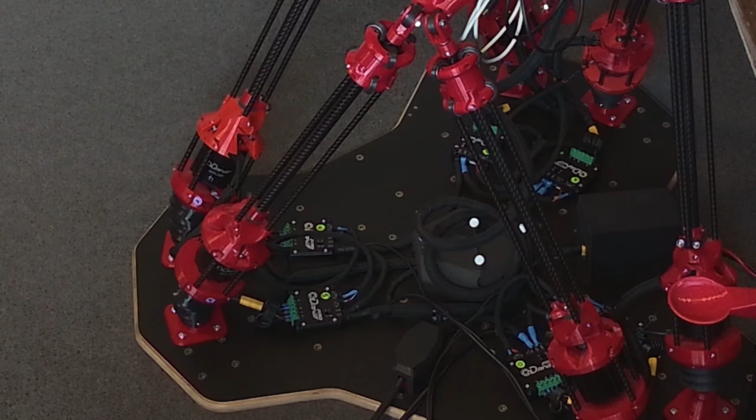The process of putting Jugglebot back together was fairly uneventful. I took the opportunity to give everything a good clean, a good wipe down, and the base of Jugglebot is looking cleaner than it has for quite some time. I don't know if this camera is really going to show it very well, but everything is nice and orderly down there, which I'm a big fan of. Not much dust down there, and hopefully my little protector thing keeps it that way for some time.

Before I get to the only problem that came up in the entirety of the construction, I did also change the hand spool over from the old 3D printed one to the new aluminium one. I am going to be taking some videos of what the new one looks like, but when I had the old one on, being a bit more critical of the printed design, I could pretty easily discern that the string was not perfectly uniformly running up and down the spool. And once I replaced it with the aluminium one, it was much smoother.

I haven't actually run anything through any actual movements yet now that the robot's been put back together. I'll talk about why in just a sec, but I have high hopes that this spool will not cause me any problems anymore, which will be lovely. I'm keen for all problems to be gone.

The only problem that did come up during the reconstruction of Jugglebot was that for some reason the threaded insert inside this part, which is the final stage of the universal joint that's on the end of all of the legs, in one of them the thread was super munged up. I could get the shoulder bolt in halfway, but then there was something in the thread that was stuffing it up. This was the second last actuator that I had to put on, and at the time I was like, this only needs to go on once. If I can just brute force it in, then I don't need to worry about it anymore and the problem will go away.

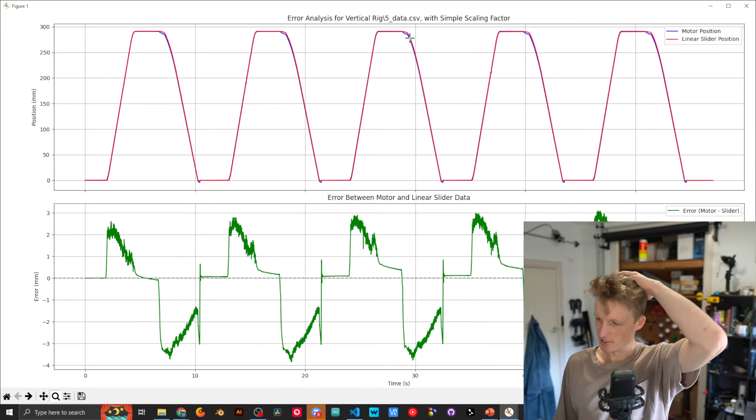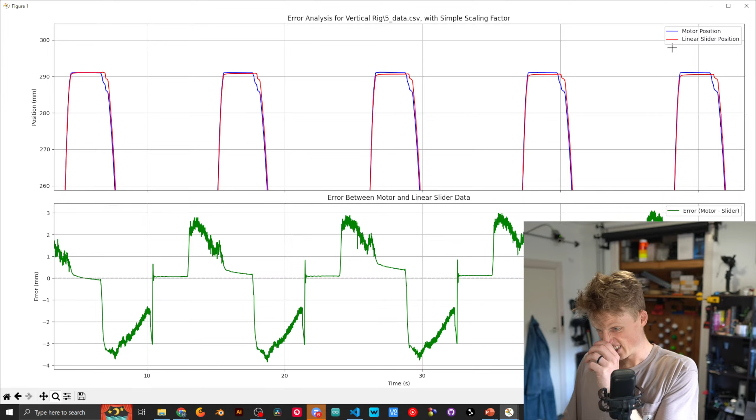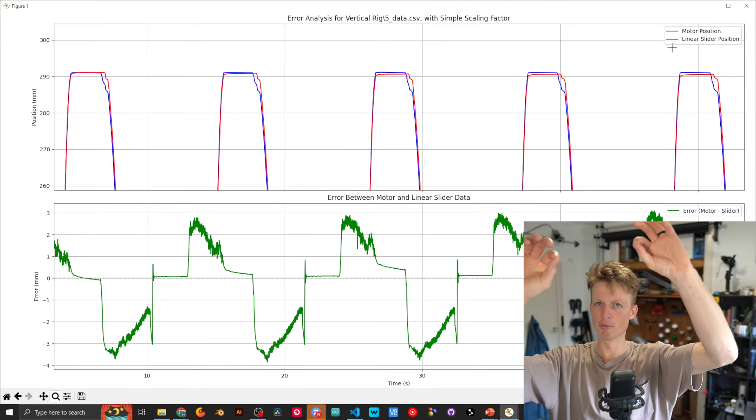So I was thinking of other ways to improve this, and you can see in the title, I've got simple scaling factor. This is the way that I have been scaling this data every time I've shown it to you. What that involves is we leave the red line, the linear scale measuring data, as it is, and then we just take the maximum value of the motor position data and scale that so that it matches the maximum of the linear slider. So we're basically picking the maximum of each and raising it so that both maximums are the same. In my mind, that is the most straightforward way that I could possibly do this.

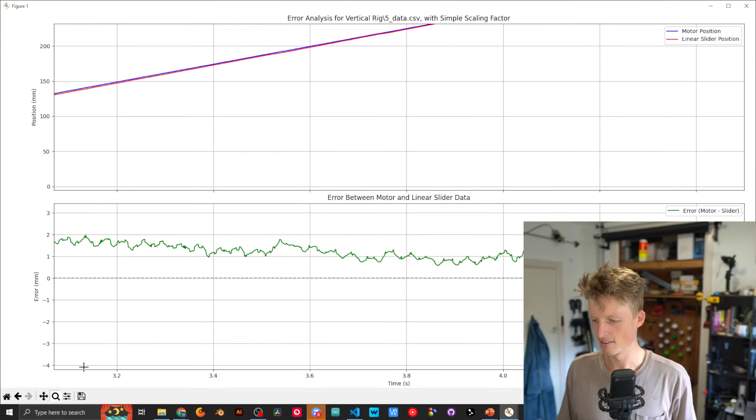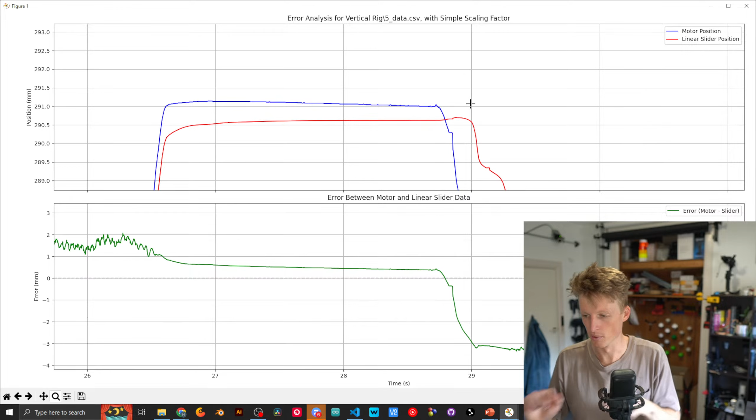It doesn't even consider the rising stage at all. It's only looking at just the maximum. And also, this is after the 0 points have already been aligned, so they're both aligned at the start. And I was like, well, that's a super basic thing. If there is any erroneous peak in the motor data, it could just be this little tiny bump here. I don't actually know what the maximum for this one is, but if that little bump was a bit bigger, that could really mess up this scaling factor and throw the whole thing off.

So I thought, okay, I'll do a slightly more sophisticated approach, and I'll show you on a different one because that one wasn't a good example, nor is this one. I'll show you my code as well. Okay, this one's better. So my idea here was that rather than taking the absolute maximum, we can take the average of the position when the slider is at the very top. The actuator has fully extended, it holds its position for, from memory, 1 or 2 seconds, and then it goes back down.

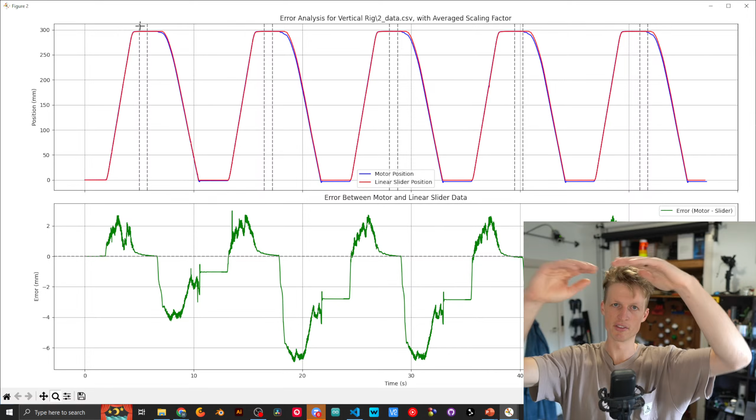So I was thinking, when it's at that held position at the very top of its stroke, we can take the average of the linear slider position and the motor position, take the average of all 5 of those, and then use that to construct this scaling factor.

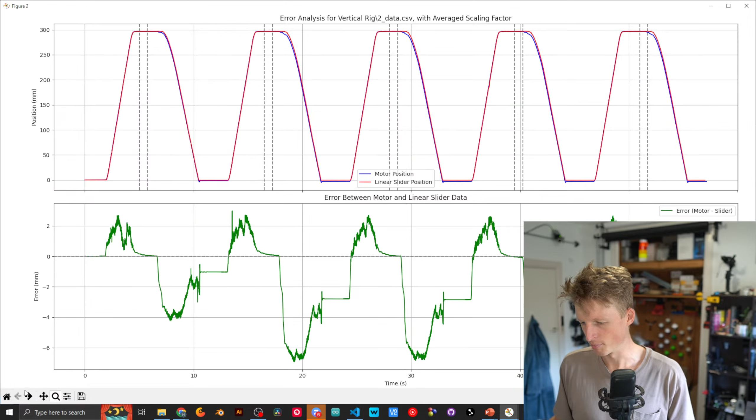And so we can see here, these gray dotted lines are the start and the end of the period that we're averaging over for each sample. So we're basically taking the average of all of these gray sections for both the red and the blue data. And I would have thought that would lead to a more accurate scaling factor, so that way we would have, on average, less error throughout the entire data set. But that's not how it worked.

So I'll go into a little bit more detail with that analysis in just a sec, but I want to show a summary of what I've found. So keep in mind as well, don't forget that we have 2 sets of data for each actuator. We have a set where I had the testing rig vertical, in the in situ-ish situation for the actuator. So everything was vertical. The big problem with that is that because it was all vertical, I couldn't really support the measuring stand super well. So it was wobbling a little bit at the start and at the end.

When the actuator was starting to push or pull, the whole tower would kind of shift a little bit, which I thought was a no-go, and that was adding to the sources of error here. And I was like, okay, that's terrible. I'm going to do a horizontal test. So we also have a second set of data for every single actuator in the horizontal case, where the entire testing rig was clamped down onto my desk and there was no movement at all except for the actuator itself, obviously.

So I've gone through all 12 data sets, so 6 actuators, horizontal and vertical, and I've looked at both the simple scaling and the average scaling, and this is what I found. So what I'm about to show is the data set and type of scaling factor that has led to the smallest mean error and standard deviation error. From memory, for all of them both of those results were lower. So the mean was lower and the standard deviation was lower.

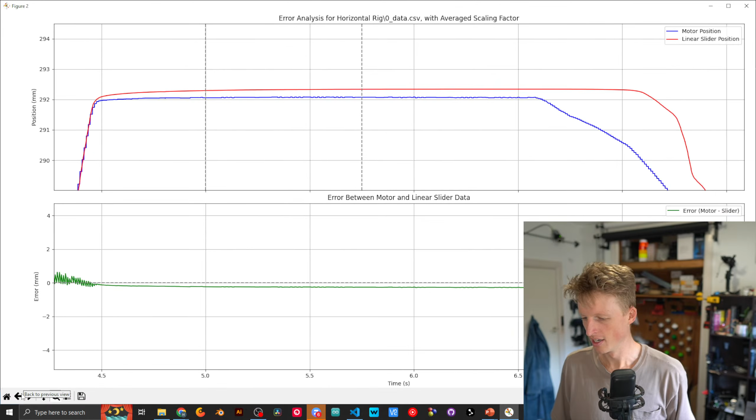And we are above a certain threshold so that we're not looking at the bottom ones as well. And then, yeah, just do that for all 5 peaks. But that wasn't working. I think part of the reason is because despite the fact that this looks flat, it's not actually flat. I mean, I guess I could just set the threshold to be like 0.1 or 0.5 millimeters or something. That would probably work. But I couldn't get it to work and it was just frustrating me and I wanted to just get it done. So instead, I just did it manually.

And I was thinking, okay, cool. Because all of these actuators ran the exact same procedure where they would do the exact same motion, I didn't change the code at all between all 12 of these tests, they should all have the same time. So we should be able to say, band 1 is between this time and this time, band 2 is between this time and this time, and so on for all of them. But unfortunately, they did not all go at the exact same time.

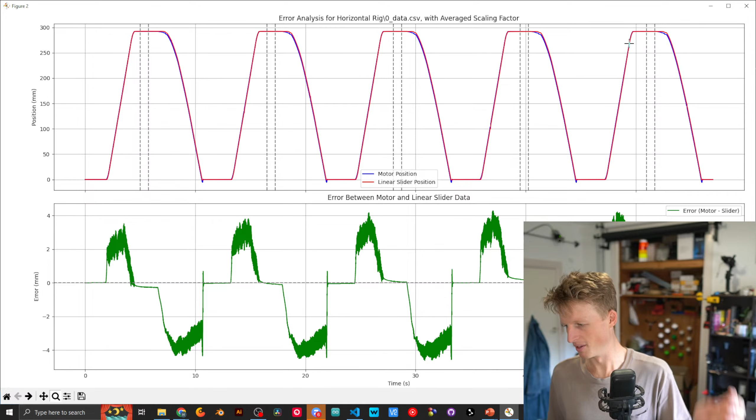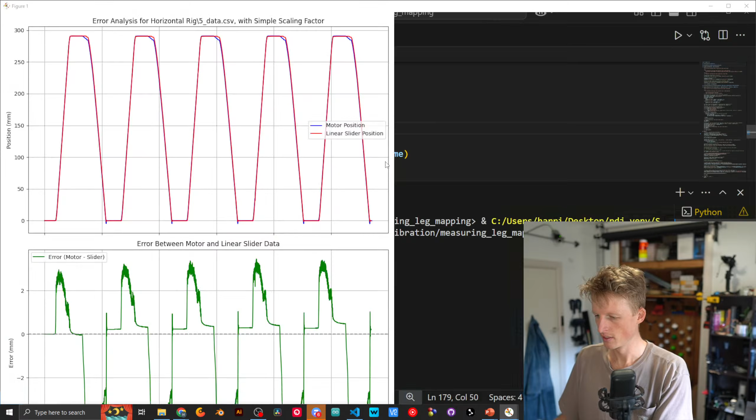So like here, for the 0 data, we can see that the bands are pretty solidly in all the flat regions. But then if we look at, for example, 5, they don't line up. Oh, maybe it's the vertical one. Because that one was actually pretty close. Oops. So with the vertical one, yeah, it's all the way off the end.

So here, I don't know why. Maybe it was because we had to push against. No, that doesn't make sense. I'm not really sure why, to be honest. These are slightly different. Something caused the actuators to run a bit faster. Maybe I did change the code between the vertical and the horizontal ones. I don't remember, but yeah, so we can see that the window is now pushed off the back.

So it's a very naive approach, and not for all of them does the window exactly match up perfectly with the flat region. But I'll talk about that more in just a sec. I'll talk about the good display of difference thing in a sec as well at the end, once we get through all of them. So for 3, vertical simple is the best, which is like, why? The tower was wobbling everywhere. Why is that better? 4, vertical simple as well. And then 5, vertical averaged, which is the one that I just showed.

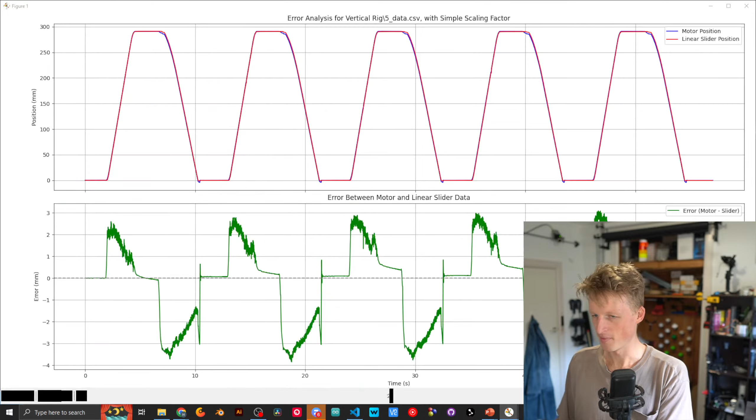So this has less error than the simple scaling approach, even though this window is averaging over these data in here, which is clearly not the peak. So what? So yeah, it seems like having a lower scaling factor leads to less error. But I think part of the reason why that is the case is because for all of these samples, we see that the motor on the way up and down is where all of the error is happening, just on the up and then just on the down. At the top and bottom, it's not so much.

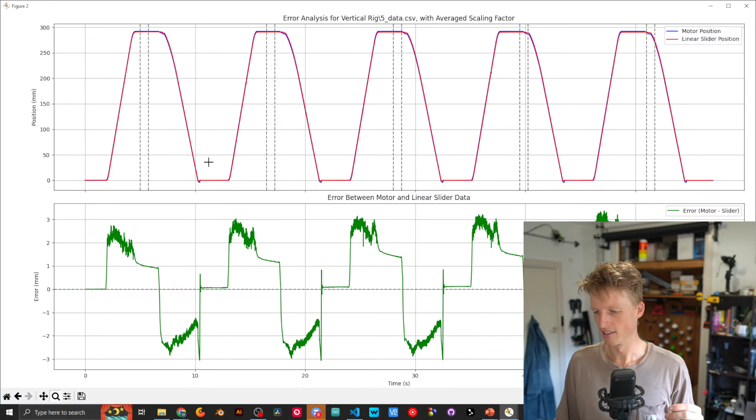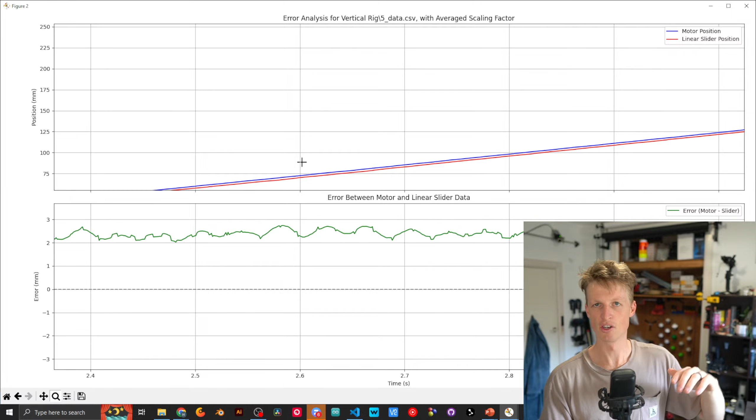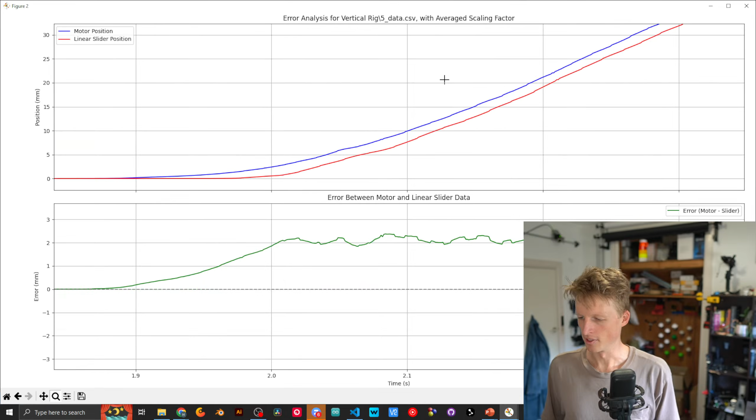So I'm thinking the reason why this is showing a lower overall error with a lower scaling factor is because the motor data is higher than the measured data, for a reason I'll talk about in a sec. And so by having a lower scaling factor, we're kind of compensating for that. Now, the reason why I believe the motor data is above the measured data, or the linear data, is because of the slop in the actuators, basically.

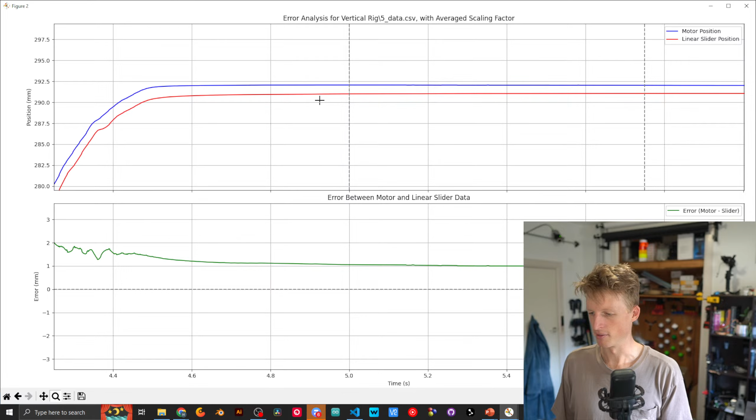So at the very beginning, the motor starts to spin, the string is starting to take up the tension, taking it up, and then eventually it's all taut, all of the slop is gone, and then the linear part of the actuator actually starts to move. And that, of course, means that the motor position is going to be ahead of the measured position all the way up until the very end, when they meet up again. Well, in most of the cases, they meet up again. Let's look at the average of all of these. Okay, no, because we've scaled it, we can look at this one. With the simple scaling, they do meet up pretty closely.

Yeah, so I'm thinking maybe because of that offset, having a lower scaling factor will be less erroneous during the movement phases, which is kind of artificial, but also kind of legit, because when Jugglebot's actually working, it's going to be spending a lot of its time moving around. And if we are ever needing it to be in a precise position while the actuators are moving, it could be better to use a lower scaling factor to compensate for this stretchiness.

But then if we're trying to get Jugglebot to be really precise when it's still, we maybe would want a slightly different scaling factor, so that once the Jugglebot is stationary, all of that slop has gone away. It could be elasticity in the string as well. So once the actuator has stopped moving, that elasticity continues to extend the actuator just by that little bit more until that elasticity is gone, and then it's at its correct position.

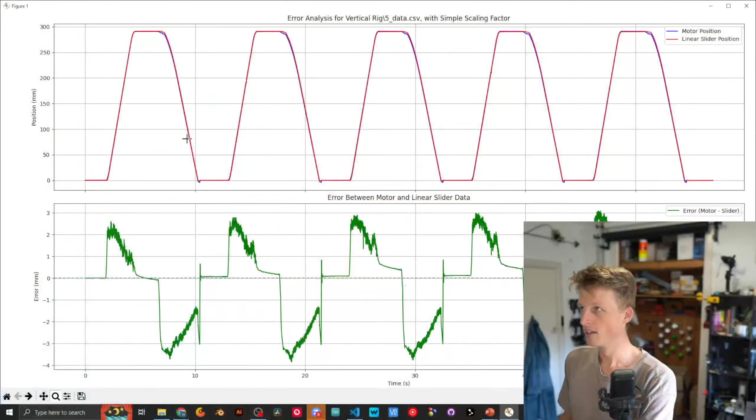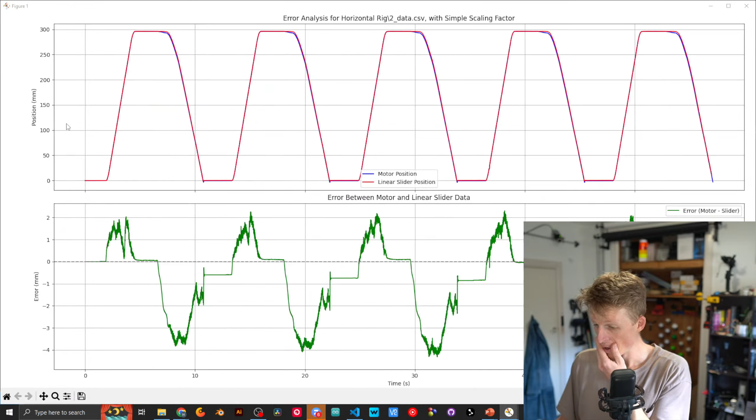But whatever the case is, it seems like the actuators are behaving slightly differently dynamically as they are statically, which makes it a bit annoying to calibrate them precisely. Yes. The one other thing that I wanted to show is for actuator 2, the horizontal data. And yes, so here, it doesn't really matter which scaling factor we look at.

Here we can see there's a massive, massive difference between the positive error and the negative error. And this is indicative of when the actuator is extending, we're getting this positive error, and then when the actuator is contracting, we're getting this negative error.

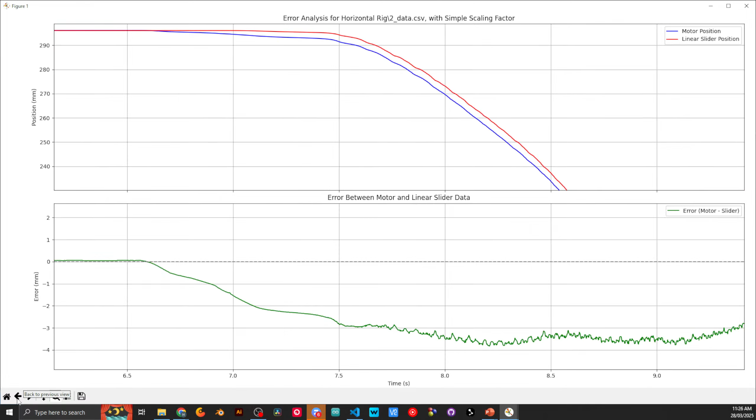And I believe it's for the same reason, where the motor starts to move down, and then it pulls the string, pulls until all the tension is gone, or the slop, or whatever it is, is all gone, and then the actuator, the linear part, again starts to move. Which does put the motor position data below the linear slider position, which, I don't know, they seem to all be slightly different.

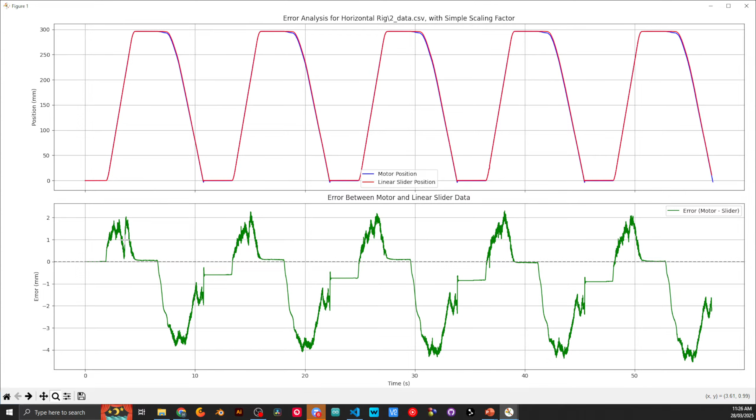And so what I wanted to point out here is the fact that for this particular actuator, there is a lot more error, like double, on the downstroke versus on the upstroke. And I believe that this is related to the fact that there are actually 2 strings in each of the actuators. It's not just one continuous string, even though it could be, and it probably should be if I knew that that was a possibility when I was designing this. But in any event, there's actually 2 strings in there.

So there's a separate string for extension, and a separate string for contraction. So this is suggesting that the 2 strings are not both perfectly tensioned, so that, for example, if the extension string is really nicely tensioned, but the contraction string is not, then the extension could be really precise and nice, but then when we go to contract, there's a bit more give in the system before it actually starts to come down.

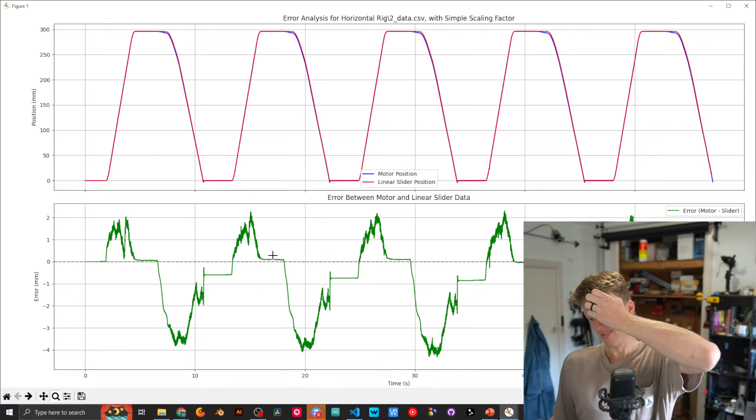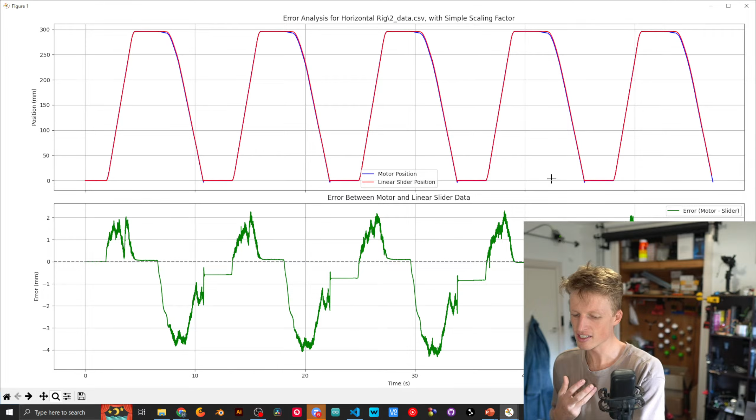This one is the most egregious example of that. Most of them are pretty closely mirrored on the top and the bottom, but for this one in particular, the contraction stroke was way more erroneous. Which, again, I don't know. In my mind, this would suggest that I could go into the actuator and retension that string, but I checked all of them when I was going through this process and they all seemed approximately equally tensioned. I don't have a good way to actually measure that tension.

I was considering making a device, a tension gauge sort of thing, like how you measure your bicycle spoke tension, which is basically there's 2 pins and then there's a spring-loaded pin in the middle, and you put 2 pins on, let me draw it. Using my hands can only get so far. Let's go to this.

And I was considering making this so that way I could just check that all of the strings are equally tensioned, but I ended up just kind of going for the old twang and listen to it test. And yeah, it's hard to get it to be really... I think that would be a rabbit hole that would take more time than I anticipated.

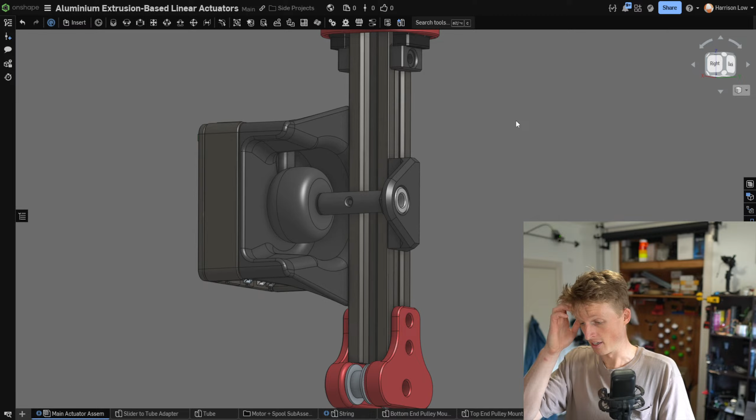So this is what I'm thinking. Everything is going to be based fundamentally on a piece of aluminium extrusion, and there are many variants of this design that I think are very possible, and I'll go into those in more detail in just a sec. But the backbone is the aluminium extrusion. And then on either side of that, we have two linear sliders. This is just for this particular instantiation of the design. So we have two linear sliders that slide together.

One possible concern that I have right off the gate is that both of these will need to be very carefully aligned. I don't have much practical experience with that, so I don't know how easy or hard that's going to be. My thinking is that we can put in the bolt on the very bottom one and do that up tightly, with both of them joined together, and keep the rest of the bolts loose so both guide rails can swivel around, then slide this all the way up to the top and do in the top bolt. In my mind, that should mean they're both perfectly lined up. And then, of course, tighten up all of the other bolts in the middle.

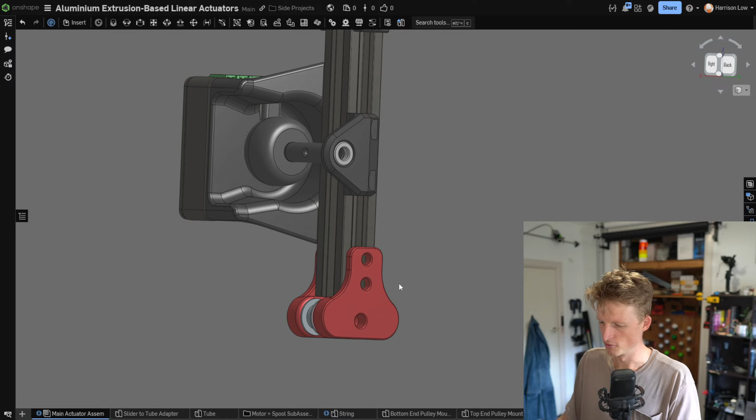In this version, it is actuated in the exact same way as the hand actuator on Jugglebot right now. I only just added this component last minute this morning just to complete it. So the string line is not perfectly designed right now. This pulley should probably be in a slightly different position. But then the string goes up, around,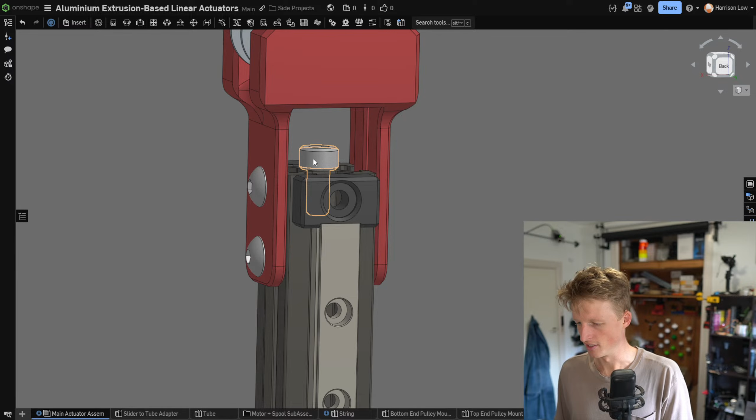up over here, and there's a tensioning mechanism in here, which is identical to the one that John designed for the current hand actuator. This is currently fixed in the CAD, but of course this hole is threaded. So if you want to add more tension, you just loosen these 4 bolts on the side, extend this bolt out with a nice convenient hole in the top, and then once you've got the right amount of tension, you can redo these 4 bolts on the side.

And I love this tensioning mechanism. I think this is so clever. John did a very good job designing that part, because for every millimeter that this raises up, you're actually extending the string length by 2 millimeters. So it's like a magnifying effect of how much tension you get for how far you extend this part out. It's very nice. I am a big fan. Of course, the string will then come down and attach onto this part in some fashion.

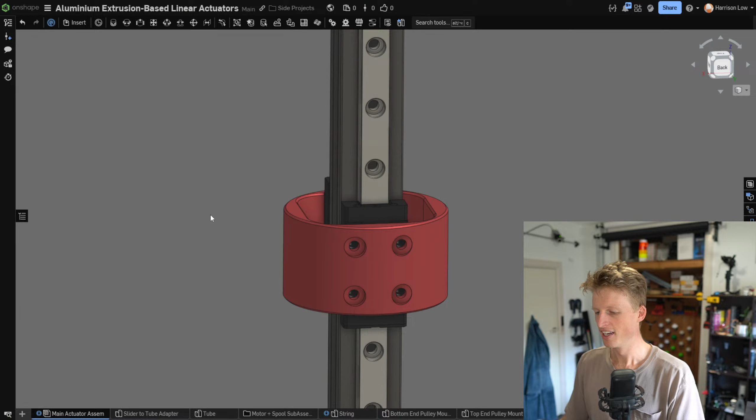Unfortunately, I didn't have as much time as I would have liked to fully flesh out the CAD of this design. I got a bit distracted with some other stuff last weekend, but it was good distraction, doing productive things that were just not this. So there are a lot of fine details here that need some work, but hopefully you can get the general idea. The main reason I'm sharing this now in its incomplete state is that all of you have historically been extremely useful in troubleshooting and coming up with different ideas for how these things work.

And I think the earlier that I introduce it to the world, the more quickly I will get feedback, and the less likely it is that I'll go down the wrong rabbit hole. Like, I am fairly certain that if I had done this same process for my current linear actuators, I would not have made a lot of the mistakes that I did, such as having 3 pulleys for every single direction. So for extension, there are 3 pulleys between the spool and the actual linear axis. And then for contraction, there are 3 pulleys.

But you don't need 3. I had convinced myself that it is mathematically necessary to have 3 pulleys, but it's not at all. You just need 2. And so many people, that's probably the median comment on that YouTube video, is you don't need 3 pulleys, you only need 2. And as soon as I saw 2 of those, I was like, oh shit, you're right. I could have removed, what is that? 1/3 of the number of pulleys. Yep. So yes, if anyone here sees anything silly that I'm doing, please do let me know, because that will save me some stuffing around.

And yeah, so then on the outside, of course, right now this is just a slider and it's like whoop-de-doo. On the outside will be either a circular or a square tube of some sort. And my hope was that I would use carbon fiber, because carbon fiber looks real sexy. But it turns out that carbon fiber tubes of this size are not only very hard to find, in Australia at least, but they're also extremely expensive. So I'm not sure that I'll stick with that. I want to finalize the design a bit more, and then work back and forth between what I can actually buy versus what can fit, because I can't really go much more tight than this. This is already pretty close.

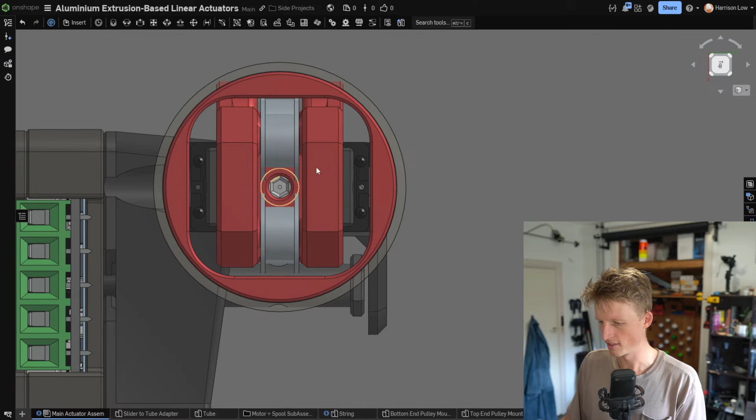Yeah, so this is one version of what this actuator will look like. The cool thing about having this all based on an aluminium extrusion is that it is extremely flexible and easy to change around. So last week I mentioned that there would be lots of variants of this design, and you could make it very small and also very large. And what I want to do there, I'm thinking of having several different versions. And there's different axes on which these versions differ from each other, but in terms of the way that the motor movement is getting transmitted to the actual linear axis, the one option, which is the one that I just showed, would have a string and the motor is mounted onto the actuator itself. And this is exactly how the hand actuator is working on Jugglebot right now.

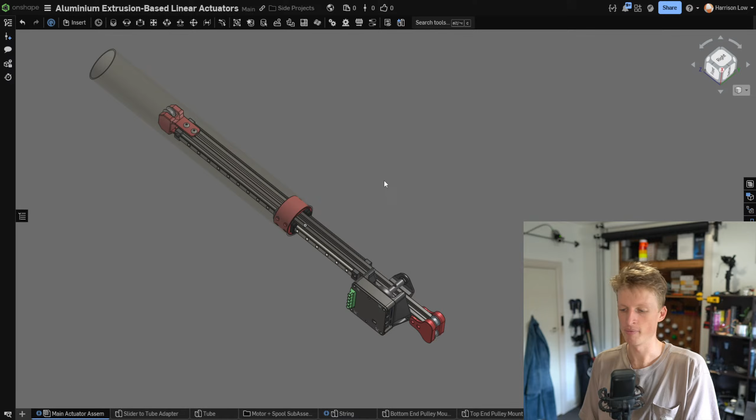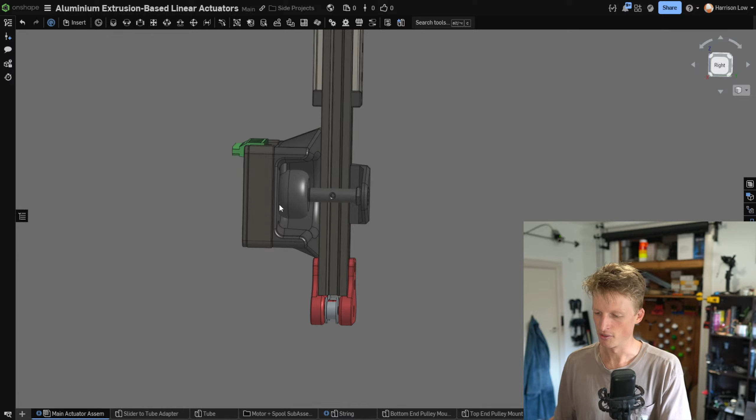And that is good, but of course, if you had some use case where these actuators are moving around a ton, then you may not want the motor to be actually mounted onto the actuator. You might want to save some weight and have the motor somewhere else. But in some use cases, it might not matter so much. Like for me, for Jugglebot, if I was to use these actuators, I would definitely need some way to turn this lower section into a ball joint, which I don't think would be too hard. And having the mass of the motor and the ODrive here, again, we don't really need the ODrive, it's just here because the encoder is on it and it's easy. But even if I had a big bulky motor like the ones that I've actually got on the legs right now, I don't think that'd be too big of an issue because it's so close to the bottom. And for Jugglebot's use case, this thing is just kind of rotating around like this, and the fact that there's more mass there shouldn't really matter too much. But in some applications it might.

So another option would be using a string actuation, but with the motor connected via Bowden tubes. And you may remember, if you've been following this project for a little while, my older linear actuators had exactly this, where I had Bowden tubes going up to the actuator itself, and then those went around and the motor was actually held in the base of Jugglebot. And I had some problems with that. I think that if I was to look back on them retrospectively now, a lot of the problems were just due to the implementation that I used when I made this.

I will have to do some testing on this to see how well the linear rails and stuff hold up to this. But you could have the actuator completely somewhere else, and then the motor and all the electronics can be in one space, and the actuator itself can be in a different space. So that could be very useful, I imagine, for certain cases. I have a feeling this would work underwater, at least for a while. Maybe not in salty water, but I think that would be potentially an interesting case.

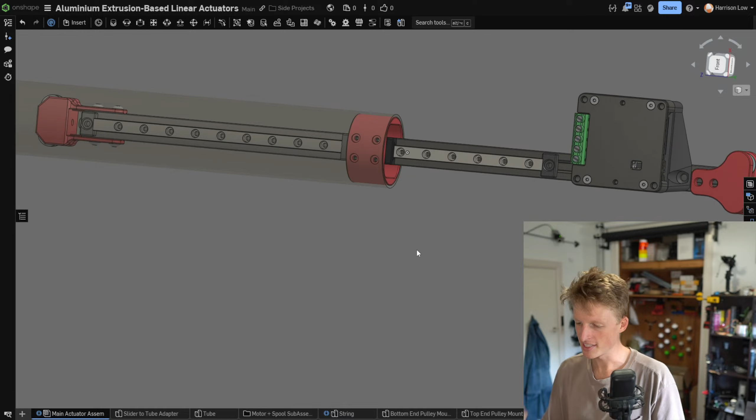If anyone knows of any way to sense linear motion accurately that's small, I would love to know, because I agree with James. That's a big aspect that this design is missing. That actually reminds me, one massive thing that I am very eager to change is the way that these actuators home and the way that they know their limits.

Because this homing business is cool, but it's not precise enough. It's really not precise enough. And like, there's no feedback up until right at the very end. The only feedback that the actuator gets in terms of its position is, oh, have I hit something? Oh, that's not good. I'm probably at the end. And yeah, that's not a good way to go.

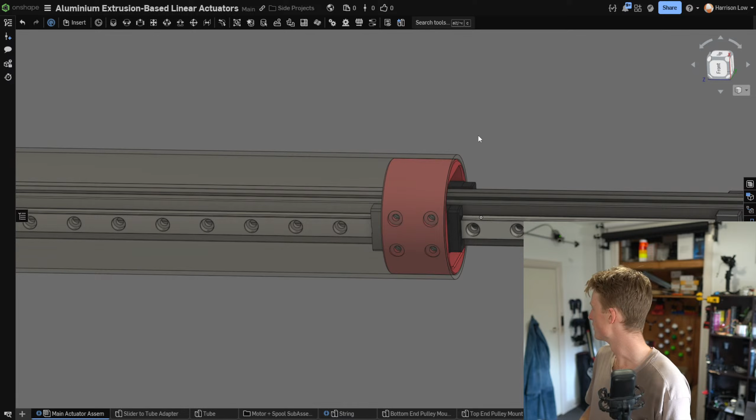So what I'm thinking of doing instead is, I haven't modeled these in, of course, but having on both ends 2 limit switches. One limit switch. Let me see if I can... I don't know where my limit switches are. This is the problem with having so many bits, is that I've got to scan my parts boxes to find them. Yeah, okay. You can imagine it.

In case you don't know what a limit switch looks like, it's like a box like this, and there's a switch up here. And if you press down on this, then that bends down, and there's like a little button thing in here. There's various versions of these, but these are the ones that I've got. So when you push this down enough, it will push down on this button, and once that button is pressed, then it will know that the switch has been pressed.

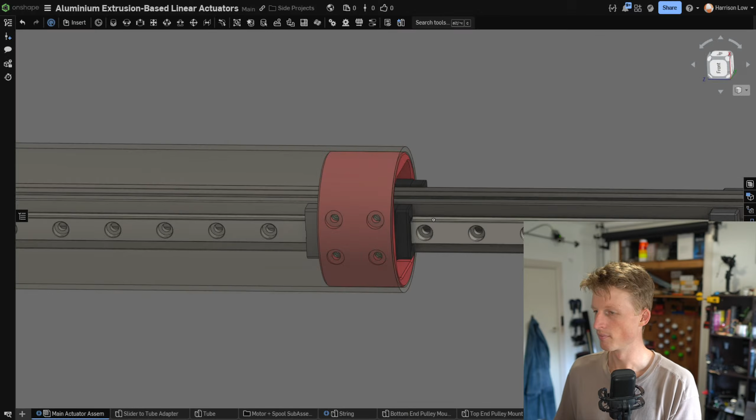So what I'm thinking of doing is having 2 limit switches for each end. Let me draw this for you. Come on, let me draw. It's highlighting. So one limit switch would be in here with a thing like this, and then the other limit switch would be like this, with the switch like that. The first one would be a warning saying, hey, you're almost at the end. You're about to hit the last point.

But the actuator will be able to continue past that, because this switch will just be pressed down, and then it will just be sliding against that inner surface in there. Of course, we would need to make sure that it doesn't get caught like a barb on the other end of this, but that's not an issue, I think.

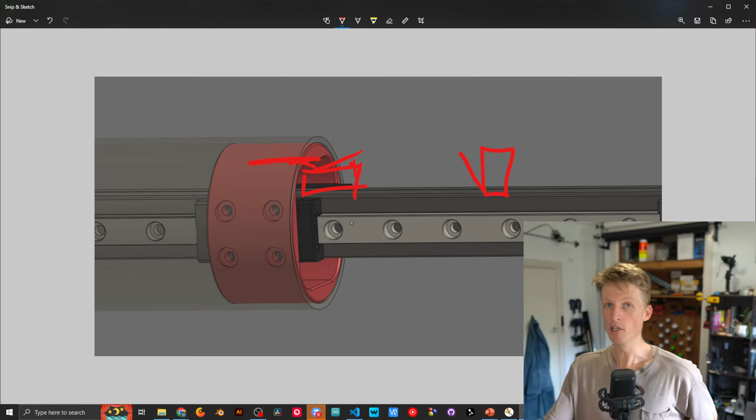Then the actuator will be able to continue going until it hits this second switch, and I'm thinking that we can just route the power to the motor through that switch. And that way, if it ever hits that switch, then the whole thing will have to cut off. It doesn't have an option. Its power is gone, potentially. Or something to that effect, where it just basically shuts the actuator off.

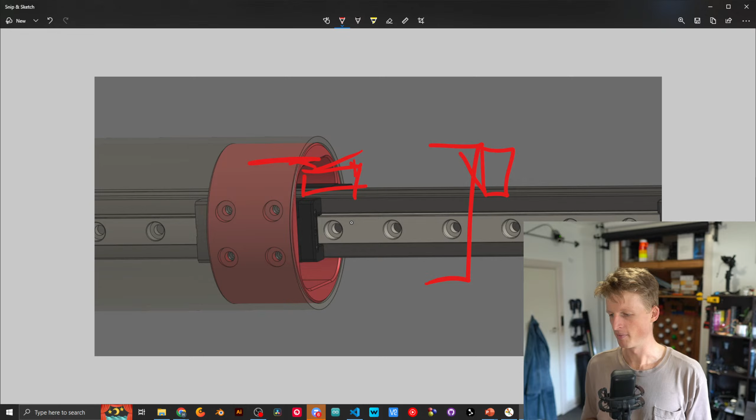Of course, having it turn the power off is a bit drastic because it means that I'll have to manually go over there to remove it off the switch. But yeah, I think something to that effect would be fantastic, because that way this switch, as long as I don't move it myself, it's going to stay there all the time. And there's no force ever going onto it.

So it's not like the current foam things where the foam is going to compress more over time. This is going to stay in the exact same position. The only thing that's ever happening to it is that this tiny little, very easy to flex switch part is just getting compressed, and that's it. And yeah, in my mind, this will lead to much more precise homing.

What do we got? Decoder and Joe have suggested laser time of flight measurements, or ultrasonic or laser. I have tried ultrasonic linear measurements in the past, and the ones that I've tried at least are good in very specific situations, but they're not super precise. They're not millimeter precise. And I think that I would want that.

Laser, I had a quick look at laser measuring systems after the stream last week, and I couldn't find anything that boasts millimeter level precision that's not like $4,000. So I'm not sure. If you guys know of any specific devices that are good for this, I would love to know, but I couldn't find any. It was only a quick search, so it's possible that I just didn't look for long enough. But yeah, I do like that idea of having a remote, such a small component to do that measuring.

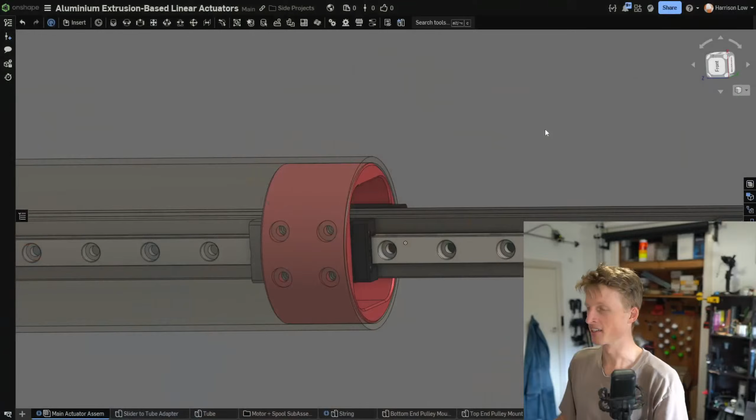Or use that retractable cord at the base around the rotary encoder, then attach to the slider. Put the rotary encoder on the moving part. That could be interesting, with a little wheel that runs along. That actually could work. Having a rotary encoder on the moving part with, I've got these little, where are they?

Yeah, like this sort of thing. I've got various types of these sorts of bearings that are designed to fit into the linear slider. Let me show you on the end. So they fit perfectly in that groove in there. So if there was a tensioning mechanism to keep that in contact, and obviously we probably want to use this one because this one's slippery as, but that could work. I like that idea. It does mean that there would have to be some more big stuff inside here though. Yeah. I think I like the laser option the most if they were precise.

Yeah, rack and pinion, no slip involved there, definitely. Time of flight 400F is the first time of flight sensor that comes to my mind, but I definitely can't remember the exact accuracy. Sub 1 centimeter, that's decent. Joe has a very good point. If the rotary encoder is on the moving part, then I have to deal with wires. Yes. There's definitely lots of options. I'll start a thread on Zulip about this, and we can talk in more detail there.

So the two options that I've talked about so far are both string actuated, but I think it's very reasonable to then go out onto a belt actuator. Of course, this would mean that the motor has to be on the actuator itself, because belts cannot flex in the same way that strings can, unless we use one of the flex spline ideas that Joe was suggesting before, which could potentially mean that you could have the motor off somewhere else and the whole thing would still be belt driven. I'm a little bit triggered still from my last experience with the belt drive, where I just could not get the tension to work nicely. My first foray into belt drives was not hugely effective, but I think that if it's implemented properly, this could work really well.

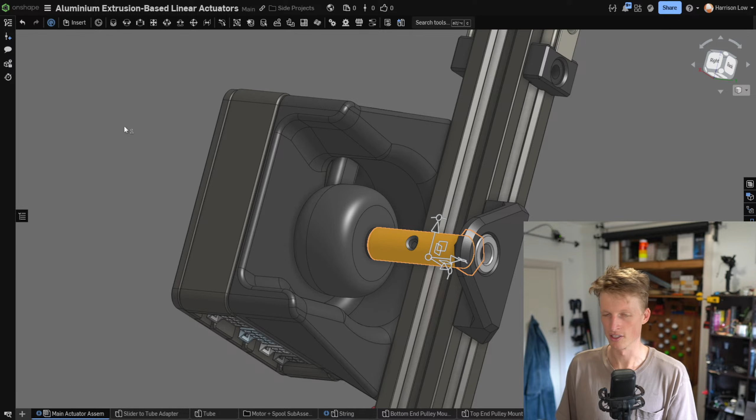So I think we could just have pretty much exactly the same thing as what we have here, except this spool would be a toothed drive pulley. We would need some idler pulleys on either side to keep the tension on that drive pulley. But other than that, it's the same. These are literally belt idlers, that's what they are designed for. And so everything else would be the same. The belt would just connect onto this part in a similar way to how the string would, and would be very, very similar.

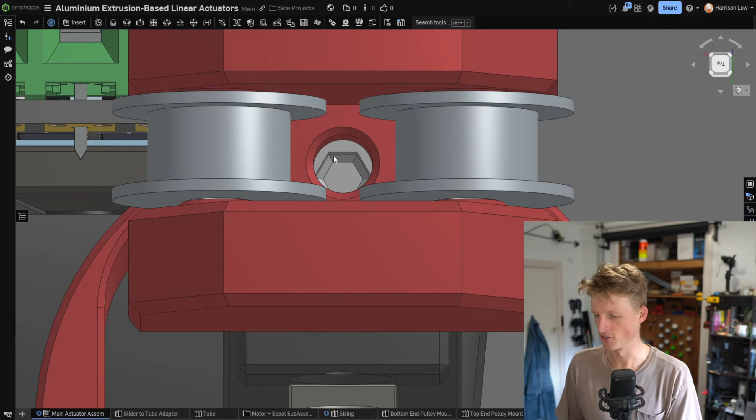One difficulty is that this tensioning mechanism almost certainly wouldn't work as well, because with a string, you can get the hex driver into here to actuate this bolt, but with a belt going across that covers up this entire width, I think it'd be a bit harder to get the driver in there. So we'd probably need a slightly different tensioning mechanism, or at least change the way that this is forced up. I could just do it by hand, manually pull it out and then tension the side ones, but I don't think that'll be nearly as effective as this. Having this bolt drive this part out is very clever. Big kudos to John for coming up with that. Yes.

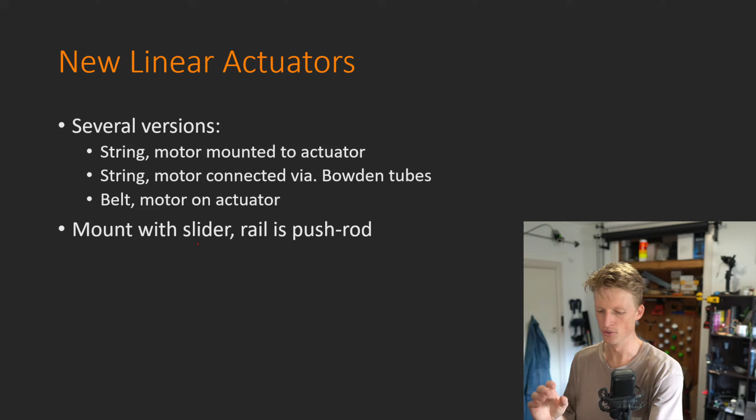So this is all one variant of this actuator that I'm imagining. And to be honest, this actually wasn't even the main one that I was thinking of until I started to CAD it, and I was like, actually, we can do this slightly differently. What I was thinking of doing before was having the linear slider mounted to the aluminium extrusion by the rail itself. Let me get some things. What we've been doing so far is having the linear rail attached onto the aluminium extrusion like this, and then this part, as it moves up and down, is what the end effector is attached to.

But a different way to do this could be to flip this around and have the slider attached onto the aluminium extrusion, and then the end effector would be this rail. So if this is attached right at the very end, I've got little stoppers on here so I can't extend it off the end. But if you imagine, this would be the linear actuator. And that simplifies some things quite a lot.

It does introduce other difficulties, like how do you get the top string that comes down over here? Both of the ends of the string or the belt that's actuating this would need to attach to the bottom of the linear rail. The bottom one is easy because you just come up from the bottom, but the top one would have to go potentially through that little tiny gap in the aluminium extrusion, down past the block, all the way down to the bottom. Potentially that would work, but there's not a whole lot of room in there. And it would mean that there's nothing that could be bolted onto this side of the aluminium extrusion, so that the string would run into it.

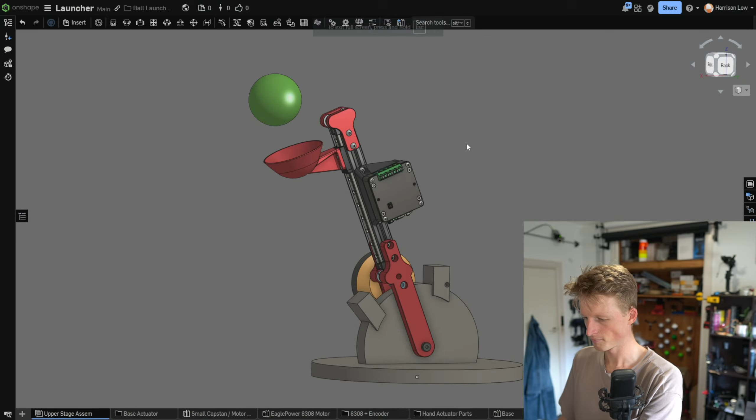It's also very dependent on this space that I'm in. Once I move houses, I will probably not have the exact same setup as I do right now, and that sort of priming mechanism will probably not be very exportable to other spaces. So what I would like to do is have something like this, where this is obviously a very, very rough model. So yeah, don't judge too hard. Again, there's also a link in the description for this CAD file if you want to check it out.

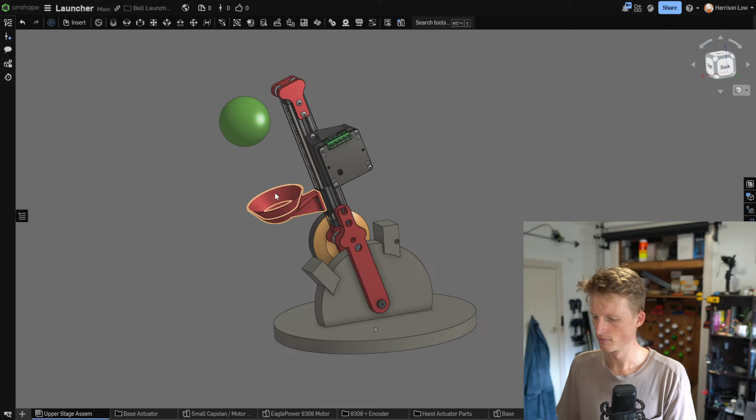So the idea here is that this base can rotate around relative to the ground, and then this part can rotate on this second wheel, and then this hand actuator is identical to the current one on Jugglebot. It's just a bit shorter because it doesn't need to be able to throw the ball like 5 meters high or anything. My thinking is that this can sit where my head is, where my gimbal currently is, right here on this corner of the desk.

So it will only need to throw the ball like half a meter high. It just needs a bit of horizontal travel so that it can reach from there over to where Jugglebot is. But this should be very easy to move around. Like this could be on the floor next to Jugglebot, and it could just pop the balls in. And I'm a big fan of this.

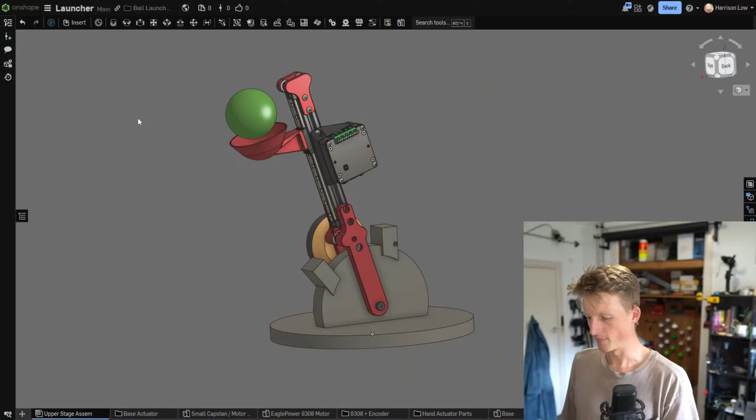I got these EaglePower motors. I believe they're the ones that Aaed Musa used in his capstan drive video, and they're so nice. They're so sexy. But unfortunately, I haven't been able to get them to actually spin. It's teasing me so much. I've got it set up, I've got my encoder on the back, but for some reason my encoder isn't sending signals. I need to work on this a bit more, but I love the way that these motors look.

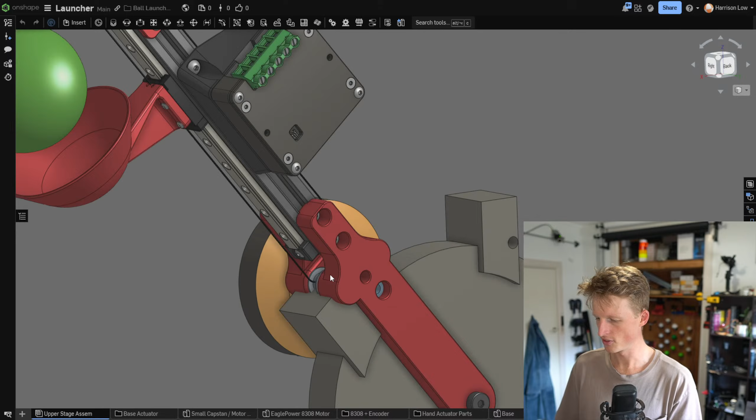So my idea is that I would have one on this part to rotate this thing here, and this would be a capstan drive, very similar to what Aaed Musa showed. So the string would wrap around here like a proper capstan. It just wraps. It's not actually tied onto the spool at all. And then the string will be fixed onto this block, and on the other end, oh, here you go. You can see I've made some progress to getting that locked off.

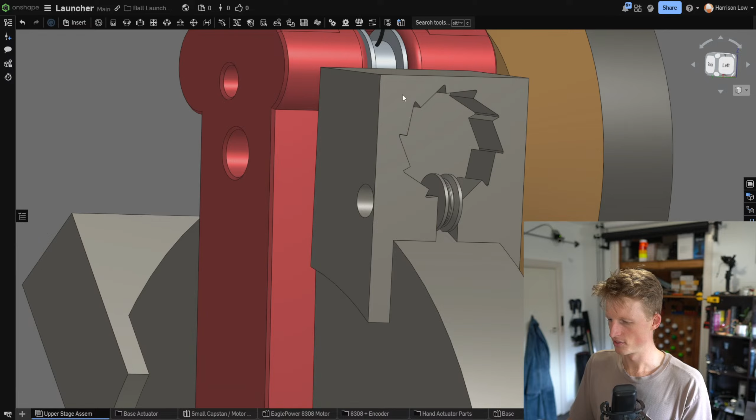I'll explain what this zigzaggy star thing is in a sec, but the string will be locked off here, and then as this motor spins, it spins the spool, which then rotates this thing along its curve.

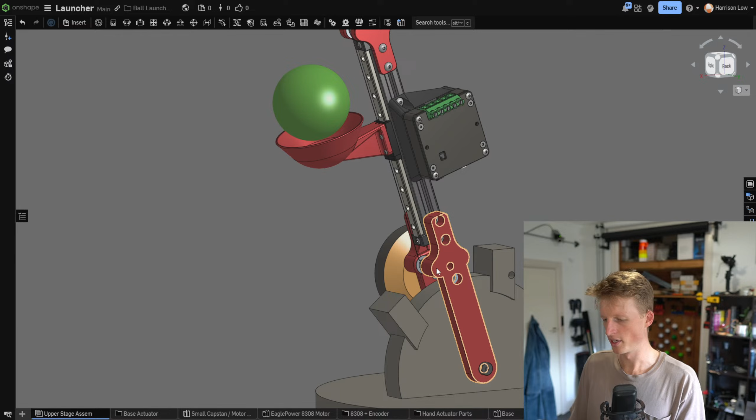Now, of course, as this is right now, this would amplify any error that this motor has by the end effector. So if this motor was 1 degree off, it would mean that the position that the launcher is actually throwing from is going to be like 15 millimeters or some large number of millimeters off, because it is so much further away from the center of rotation and where the torque is being applied.

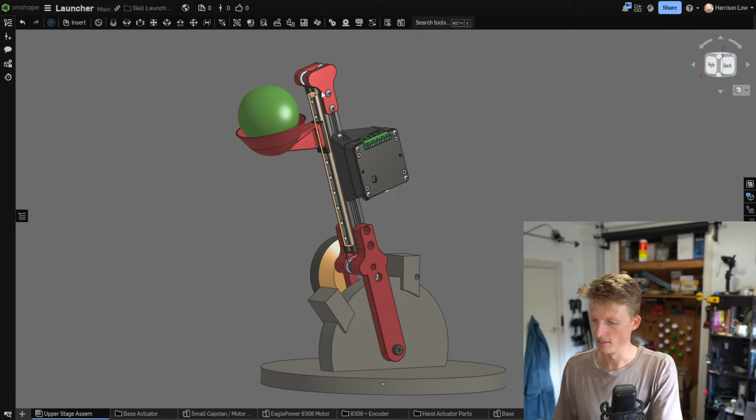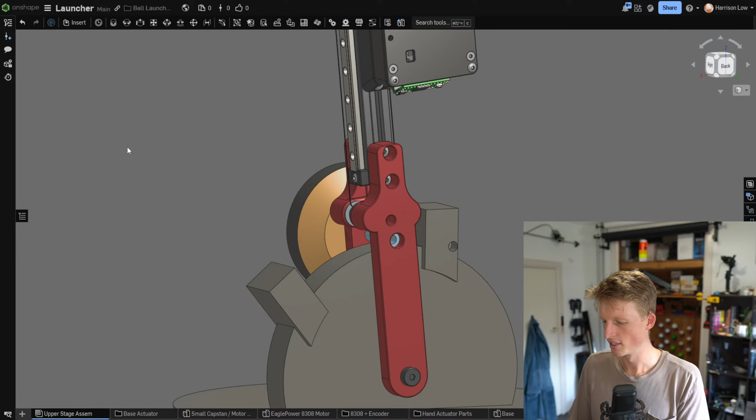So I think a better way to do this would be to have the motor right at the very end, so that the thing that is making this rotate is as far away from the center of rotation as possible, so that way all of the error is minimized. And I don't think that should be too hard to do. I could also put a rotary encoder on this entire assembly itself, so that I can actually measure the exact position of this arm rather than relying on the motor and the capstan drive, just to get a bit more feedback and to get it extra precise.

Now, actually just quickly, this little star thing is, let me just grab something. I'm glad I kept this. I've been umming and ahhing. Oh my goodness, it's covered in cat hair. It's been a while since I've taken this out. But this is something that, oh wow. Yeah, this is something that I made a little while ago.

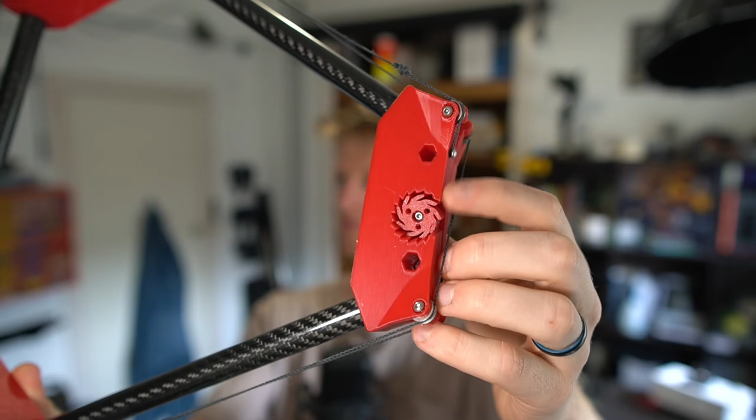The idea with this zigzaggy thing is that inside there will be a weird kind of gear, and with this gear, it's like a one-way pulley almost. So the string is fixed onto the end of this, and you can spin it one way, and it will go and it will click, but it can't spin back the other way because all of these vanes on this gear get stuck in the teeth.

And I have been very surprised at how well that has worked. It is very, very strong. You can really tension it up quite a lot. And so the way that I did that tensioning is, you can see on this pulley, there's 3 holes.

In those 3 holes was another mating piece, and so that just goes in with 3 bolts, and then I can twist that mating piece up and then remove that mating piece out, and then it's locked in. If I ever want to remove it, I can just loosen that bolt in the middle and then slide the whole thing out, and all of the tension goes away.

But I tensioned this and made this probably almost a year ago, and it's still tight, like super tight. There's no way I could tension the strings that much by hand. I've been very, very happy with how it worked.

For reference as well, I was trying to increase the, I don't know what you call that, torsional rigidity of this. This was supposed to be the bottom of the platform of Jugglebot. And so the idea is that, having these strings here, obviously we would want them as far out as possible, so that way the torsional rigidity is increased. But obviously I haven't moved forward with this because it's just too complicated and doesn't really work super well. But the tensioning thing does. So my thinking is that I would use the same tensioning mechanism in this guy.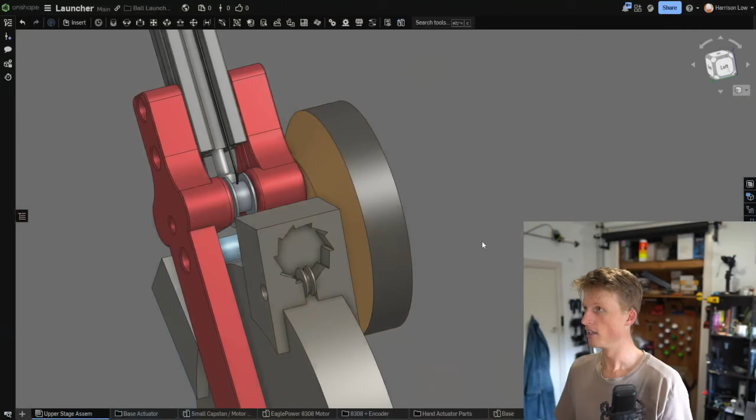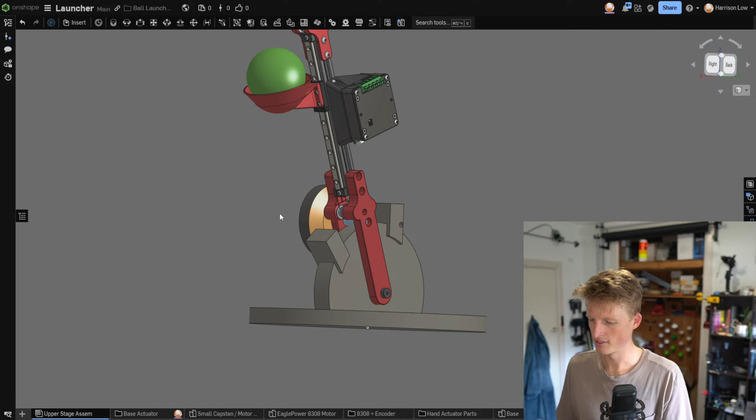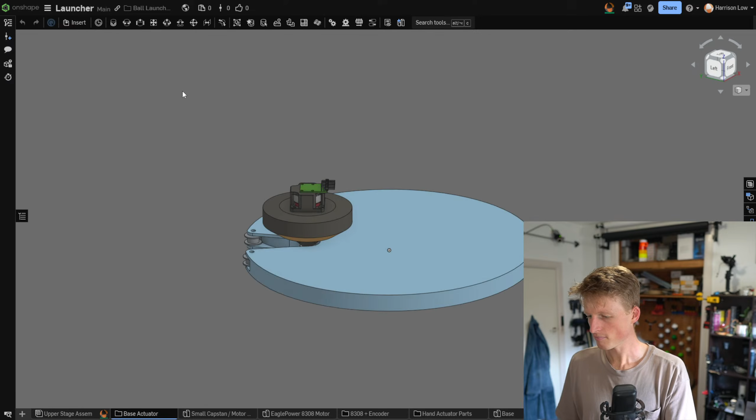Now, one other aspect of this that I am a big fan of, and I am curious to see people's opinions on, is the way that this base part would rotate. And there's obviously a lot of ways to do it. The easiest one would just be to put another one of these motors, I got 2 of them, on the bottom here and just have it directly drive this lower plate. And that would probably work, but it's a bit lame. And I think it'd be hard to get super precise movements. I kind of want to gear down these motors a little bit so that I can get it to be as precise as possible.

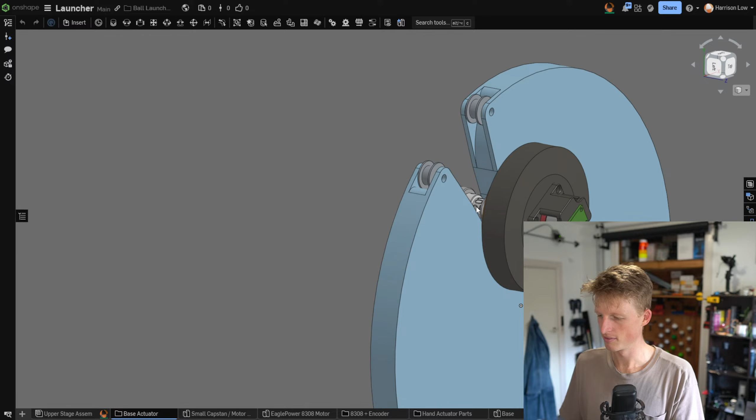So my thinking is that I can make something like this, where the motor has a 20-tooth drive pulley. This is going to be belt drive. The belt would wrap around this pulley, on both sides obviously, wrap around these idlers, and then somewhere on the back here get fixed onto the other end of the spool. And so when the motor spins, it'll spin the 20-tooth pulley, and then, for example, if it's rotating this way, it will shorten the, let me actually draw on this.

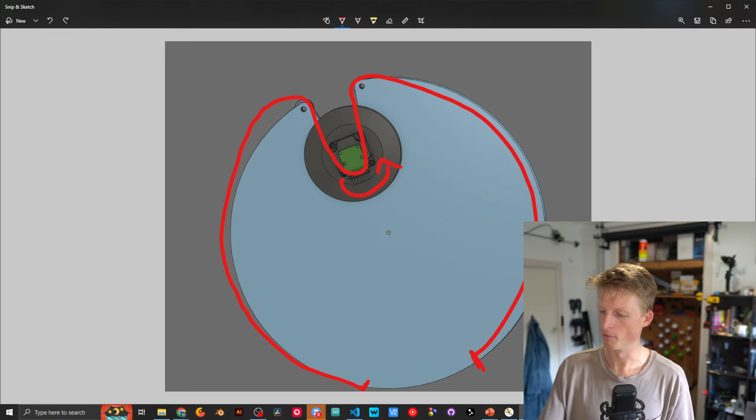Hopefully it makes sense. So for example, let's say the belt is fastened there, it goes up, around, around, around, and then it's fastened onto here. If the motor is spinning in this direction, then that will act to shorten this length of belt. So this would have to be fastened onto the ground as well, below this plate. That would mean that this has no choice but to rotate this way. And then of course it works in the opposite direction as well.

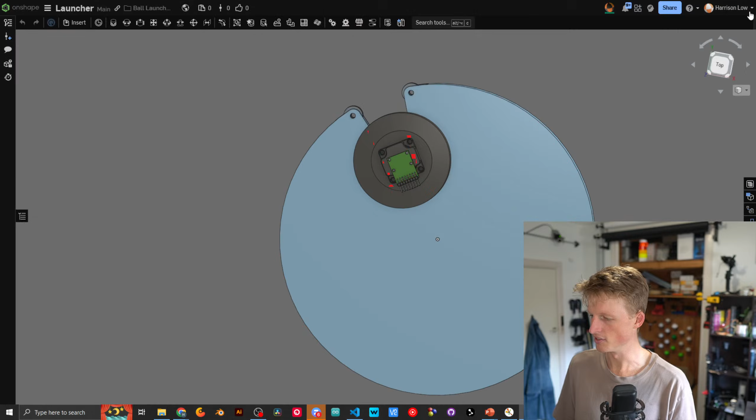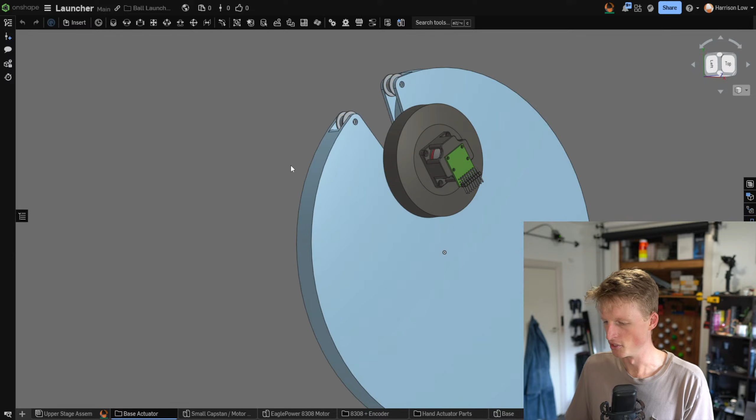Now, the big problem with this design is that it means that the belt will be sliding against this surface along here. And I didn't realize this until I had cut everything up. And I was like, oh, no. I obviously recognized it a little bit, enough to know that I should have these pulleys on here, but I didn't realize that the belt is actually going to be dragging along the main surface along here as well at the same time. Well, more properly, this surface will be dragging along the belt because the belt will be fixed.

But I don't think that should be too big of an issue, because I have this ultra high molecular weight tape, which is very, very slippery. And I'm thinking that I can just put that along that surface, and the belt would just rub along this, and hopefully it should be a non-issue. Hopefully. So yeah, that's where I'm at with that.

And again, same as the linear actuators, this does need a bit of work, but I'm going to try to make slow progress on this over evenings here and there and weekends to get this going, because this is obviously not the main focus. I'm going to be spending most of my time on Jugglebot proper, but both of these two things are kind of lingering in the background. And the reason I'm bringing this up now, even though it's at such an incomplete stage, is that if anyone has any ideas, I would love to know.

And I mean, if anyone is really, really loving either of those two things and wants to contribute to them, I would love that too. I don't really care if I am the person to make these things. I just want these things to exist. So yeah, take that how you will.

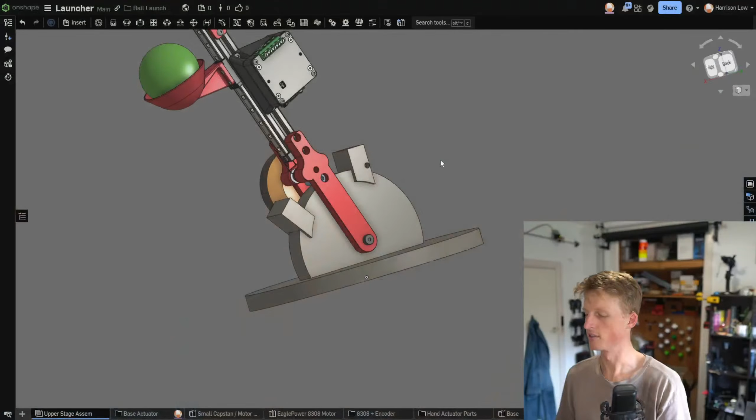Joe says, put the motor in the base and have the platform turn above it, ends of the belt attached to the platform. Are you saying the same thing but flipped around? Because it sounds like it. Yeah, because one concern with using this style of base plate is that it would take up a fair bit of space on here.

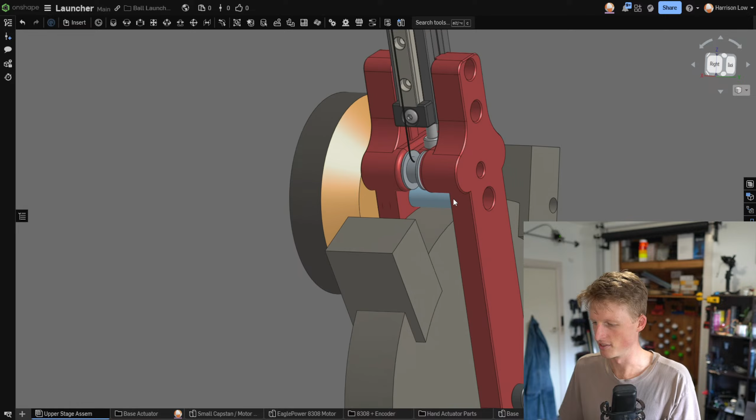The main reason why I wanted to have this motor in the profile of this base plate, rather than having it on the outside, which would be the easiest way to do this. I could just have the exact same capstan drive mechanism that I have here, but on the bottom. I just don't want it to take up too much space. I would like the top-down profile of the whole thing to be as small as possible when it's vertical.

Like a record player. I actually don't know if I know how record players work that precisely, but I will have a look after this stream. Let's see. Put the motor in the base and have the platform turn above it. Ends of the belt attached. Yeah, okay. It sounds like he's suggesting having the motor off to the side, so if I draw on this.

Yes, only the motor shaft about half. Yeah, okay. So the motor shaft would be here, and the motor would be here, sort of thing. So this would run along like that. Yeah, potentially. And because that's not moving around, the increase in size wouldn't be too big of an issue. But I don't know. I'd like it to be as small as possible. Yeah, that would definitely be mechanically a lot simpler.

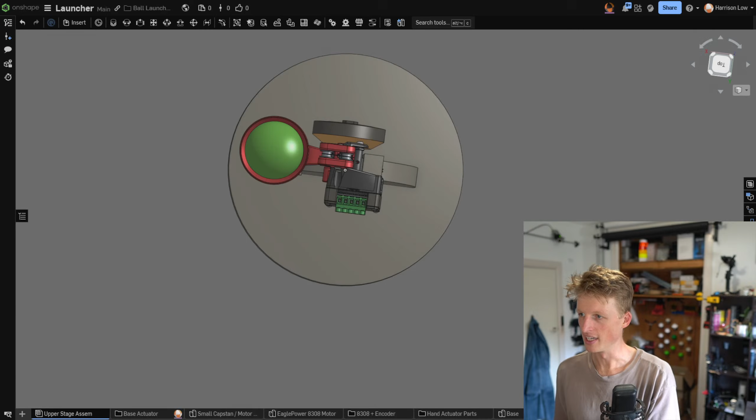Oh, my screen wasn't showing, and I just deleted it. Whatever. I get what you're saying. Okay, yeah, bit of friction, and we can probably just use ultra high molecular tape. And yes, as I said, I think it would be a good idea to move this motor actuation right to the very end, just so that it's a bit more precise.

Now, there's one other thing that has happened this week that I'm sure many of you are aware of, and that has taken more time out of my week than it probably should have, which is that Bambu Labs has come out with a new printer, the H2D. I've spent a lot of time looking into this and thinking about what I could do with such a device. And I am very, very on the fence about getting this. I'm just letting it sit for a bit. I don't want to jump into any big purchases, but man, am I tempted.

For anyone who is unaware, this printer is basically like the old Bambu one, just better. It's bigger. The speed is effectively the same as far as I'm concerned. The spool thing at the top can actually dehydrate your filament, which I love the idea of. The main thing causing controversy is that you can buy a laser cutter as an add-on. I think that's a terrible idea. I don't know why they decided to do that. There's health hazards, there's gunking up your printer hazards. It's just not a good idea.

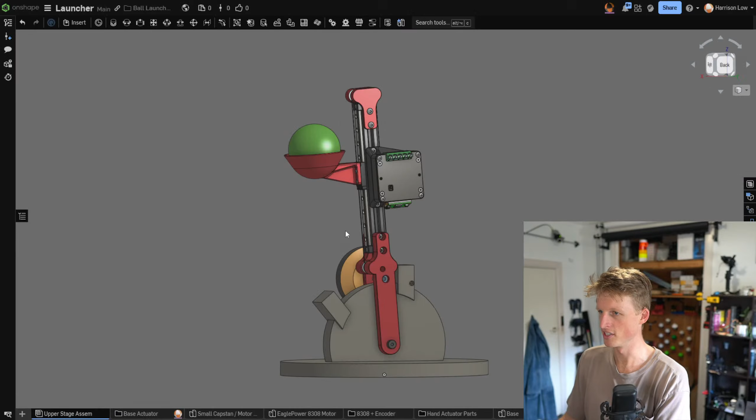But I do really like the idea of being able to print two materials at once. I've been thinking a lot about how I could integrate TPU into PETG parts or other material parts. For example, one thing that keeps giving me the shits is in the hand actuator.

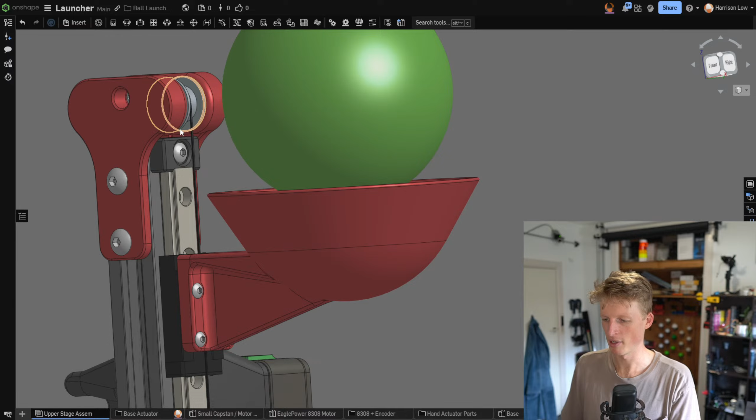To stop the slider from running off the end of the linear rail, we have these little bumpers on the ends, and these are just secured with a single, I believe, M5 bolt. But of course, this slider can get a fair bit of inertia when it gets going. So it is not uncommon for these bumpers to slowly get pushed back further and further. And unless I go over there and visually inspect it, I don't know that this has happened.

And actually, when I replaced the printed hand spool with the aluminium one, I noticed that the bottom bumper was way off the end. There was like a 5mm gap between the rail and the bumper, which is probably getting pretty close to the point where balls might fall out of the slider, which I really do not want to have happen, because putting those balls back in there is impossible. It just does not work.

So I'm thinking that if I could print a strong material like PETG for the bit that's being fixed into the rail, and then have a little TPU bumper attached to it, that TPU bumper would take the brunt of that force without making the bolt part have to shift at all. I think that'd be very cool.

And also being able to print these bellows again. I saw in one of the reviews of this printer that someone had printed these little air puffy things. It was a rigid base with a bellows on top, with a funnel on top of that, so you could squeeze the whole thing and it would squirt air out. It was literally the same bellows as these, but it was perfect. All of the layers were perfect. It was so crisp and clean. And I would love to be able to have that.

It'd be good. So yeah, I've spent many hours this week doing research into this printer, and I'm this close to getting it. So maybe next week you might see me with it.